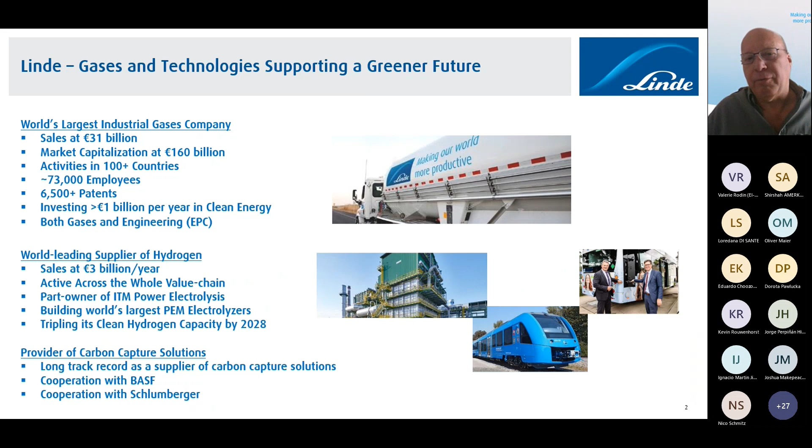Coming back to this: when we talk about decarbonization and hydrogen, it's important to be aware that we should not jump straight to hydrogen. There are a lot of things we should think of first to support decarbonization, not least electrification. If we can use electricity, clean power directly, I think we shouldn't go to make hydrogen first, so to speak, if we can use it of course.

And also don't forget about other types of fuels, low carbon fuels that we can produce and use in this different type of context. So I want to emphasize that. Still, hydrogen is there, hydrogen is highly interesting, and definitely, as I talked about already, Linde is a key player here.

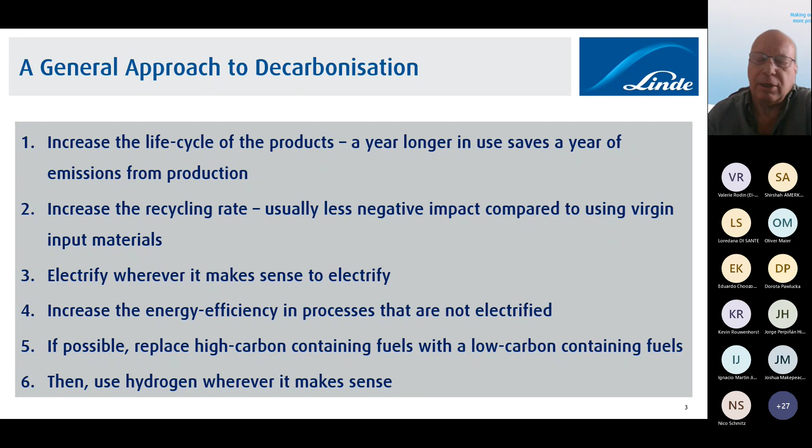We are building huge plants, for example in the PEM sector, 24 megawatts. Kevin mentioned one of them, the one at Yara in Norway, earlier in his presentation. We also have a 35 megawatt electrolyzer in the US in the construction phase already, and so on and so forth.

If we look at the steel industry, a good illustration also for other industries, a fundamental issue is probably not the scale up. Do we need quite large electrolyzers? For a scrap-based steel maker of 1 million tons, if we take that all the way to using only hydrogen, in that case only as a fuel, we would need about 100 megawatt electrolyzer. And if that's a PEM electrolyzer, clearly it's bigger than the ones we have today.

And if we use hydrogen also for the reduction part, making direct reduced iron, for 1 million tons that kind of plant would require about 500 megawatts. So it's quite a substantial scale up, but I don't think that is much of the problem that we have.

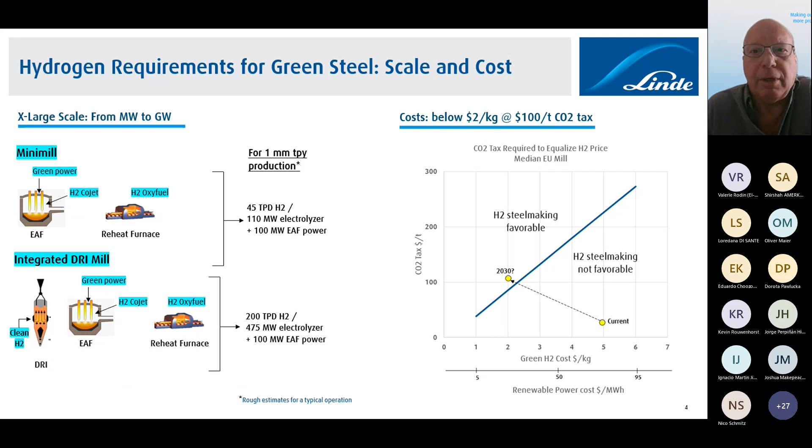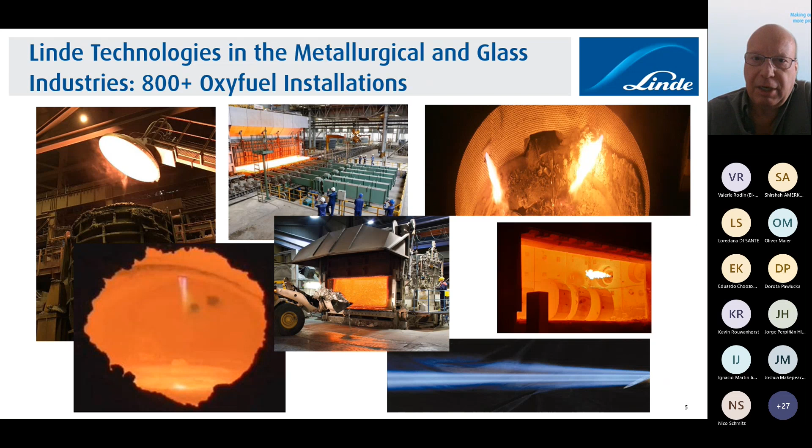If we look at technologies that we as a company, and many others of course, have used in the metallurgical and glass industries, a lot of that relates to combustion. We have done more than 800 installations of oxy-fuel across the metallurgical and glass industries. That's a quite interesting technology because it relates to fuel savings, which is key, of course, when going forward with decarbonization.

Can we use this type of technologies for combustion of hydrogen? We started a couple of years ago doing tests with different types of our burners. Here are pictures from spring 2019, Munich, and you can see 300 kilowatt burners running there, 100% hydrogen as a fuel. It worked out quite well, I would say.

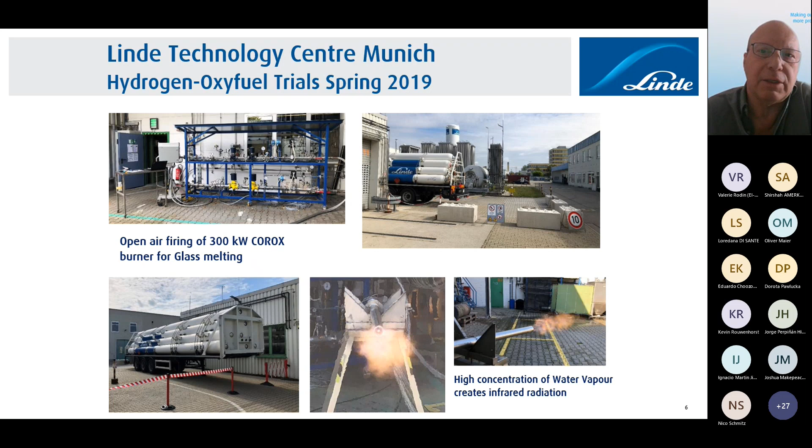This has been particularly tested for glass melting in this case. Also at our tech center in the US, we did a similar type of test going from 100% natural gas to 100% hydrogen. We did that some 3-4 years ago, and we could see that this isn't a problem. The use of hydrogen as a fuel is not a problem.

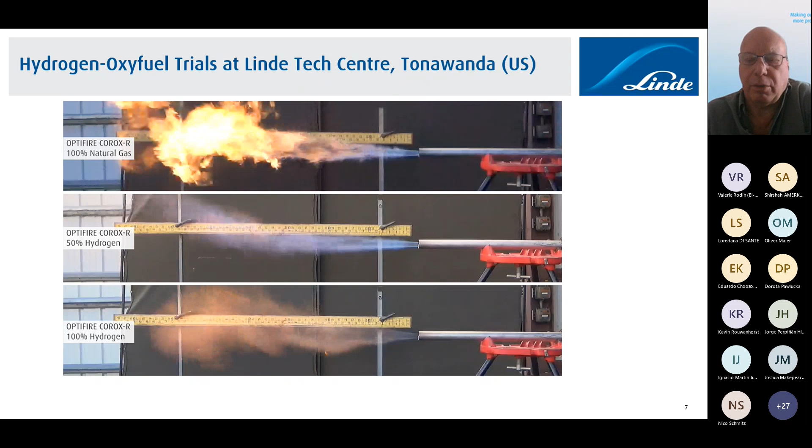Connecting now back to low carbon fuels, if we can gasify different feedstocks of interest, we could create a low carbon fuel. This could be waste plastics, municipal solid waste, biomass as mentioned earlier, and coke oven gas, for example. These are a little bit tricky to feed in a good way to certain processes, and we need to apply quite high temperatures sometimes.

One technology here is the so-called hot oxygen technology, where we are working with 1600 degrees Celsius oxygen. With that we can create, in this case, a syngas that can be used for the production of iron, either in a blast furnace or in a DR shaft. This is something that should not be forgotten, the production of syngas in this context.

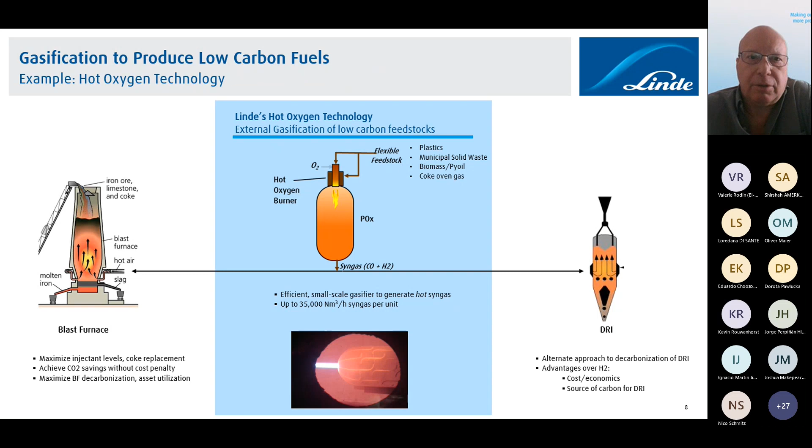This has been tested. For example, we work together with a company called Midrex. This is a world leader when it comes to direct reduction, in their test plant in Charlotte, North Carolina, generating a syngas with this type of technology from, in that case, coke oven gas, but that could be any type of material.

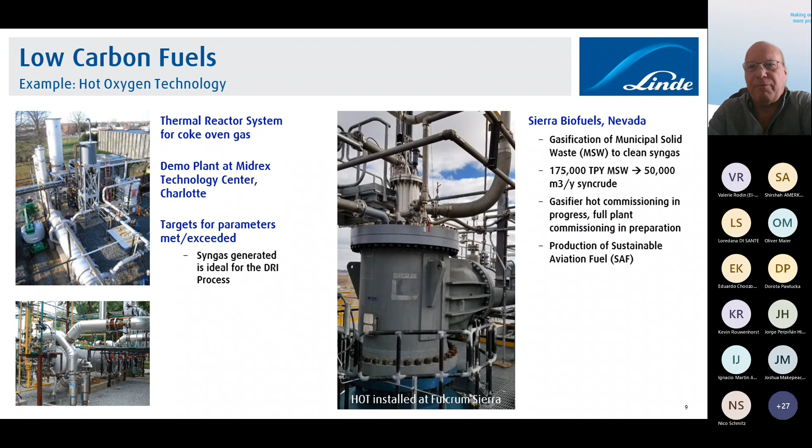A similar thing is currently going on in Nevada, where we gasify municipal solid waste into a syngas that ultimately will be used as a sustainable aviation fuel. Using waste plastics or solid municipal waste is a very nice way of creating also, of course, a circular economy.

Carbon capture is another piece in it, as I already mentioned, and using the iron and steel industry as an example, there are multiple points where we can also capture CO2 from the main sources there. That goes both for the dominating blast furnace-based route and for the DRI-based route using natural gas as a reductant.

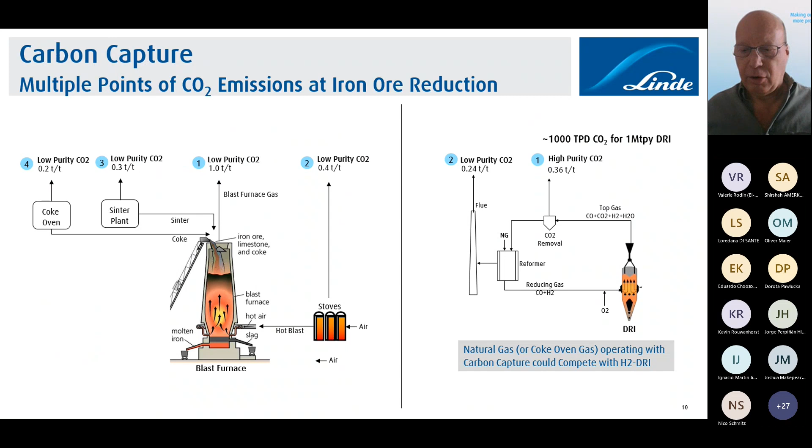And we should keep in mind that transporting CO2 is way easier than transporting hydrogen. So that could definitely be a complementary solution here.

For the sake of combining the last slides I showed, we can of course have gasification and producing direct reduced iron, and also having carbon capture of that. So there are alternatives around here as complementaries to just going directly into hydrogen steel making. And that could be similar in other industries as well.

That could also nicely connect to a circular economy. The beauty of some of this is that it's easier to fit in with the existing production structure than going directly into hydrogen. And of course, we can phase in the use of hydrogen into these processes very nicely.

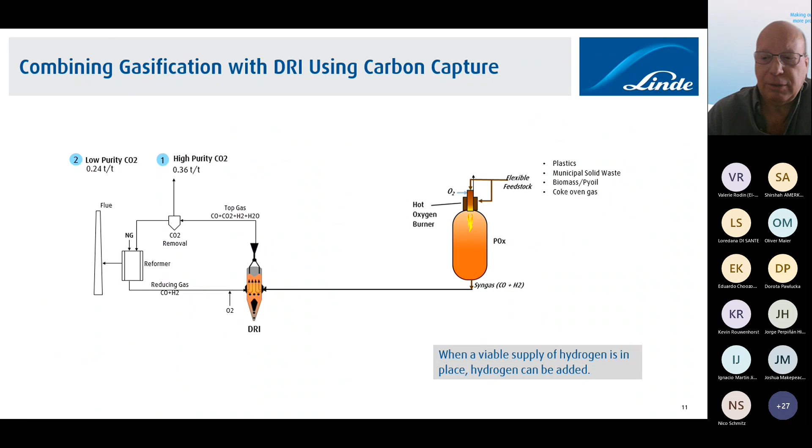However, if we look at the first steps, many times it's not about the reduction, it's about using hydrogen as a fuel. And to do that in an efficient way, we should of course be as energy efficient in our processes as possible to minimize the use of hydrogen.

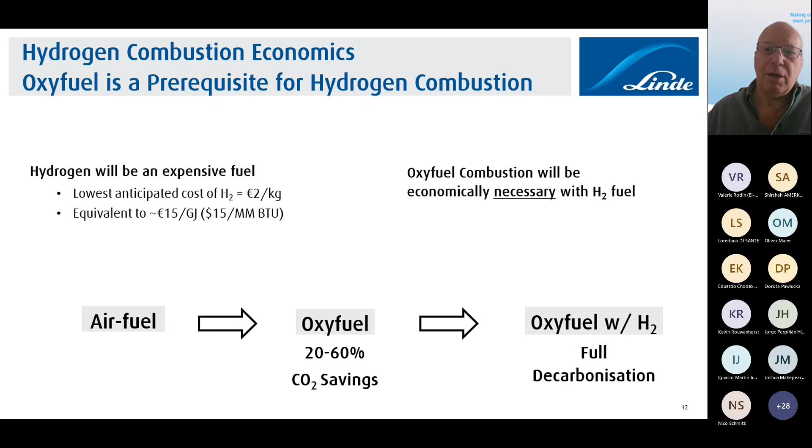Typically, as we've been working with, we go from air fuel combustion to oxy-fuel combustion, which would then reduce the need for fuel by 20, 30, 40%. And of course, we will have the corresponding CO2 savings. So that's a way to minimize the requirement for hydrogen in that situation.

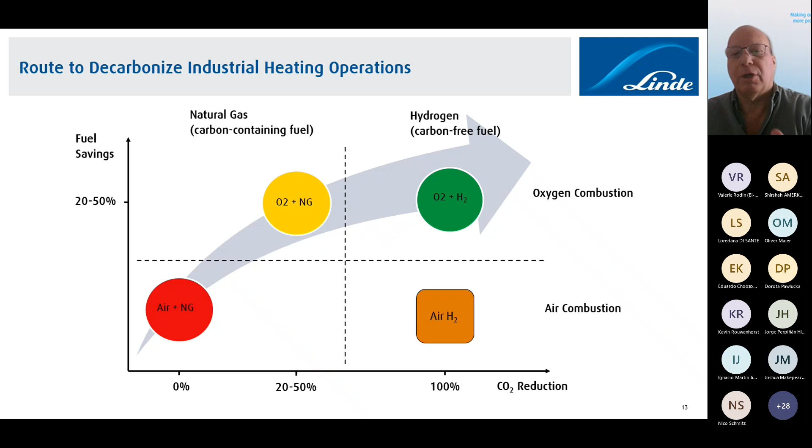So we would say that the path is going from air fuel combustion over to oxy-fuel combustion, and then with natural gas, for example, and then start using hydrogen there. This has been tested in full scale, and one great example is the steel producer Ovako, based in Sweden, where we did the first full-scale test 2.5 years ago.

We have done other full-scale tests together with other customers over time, and that has been done for heating of steel. So we have done tests with, in this case, 25 tons of ball bearing steel grades.

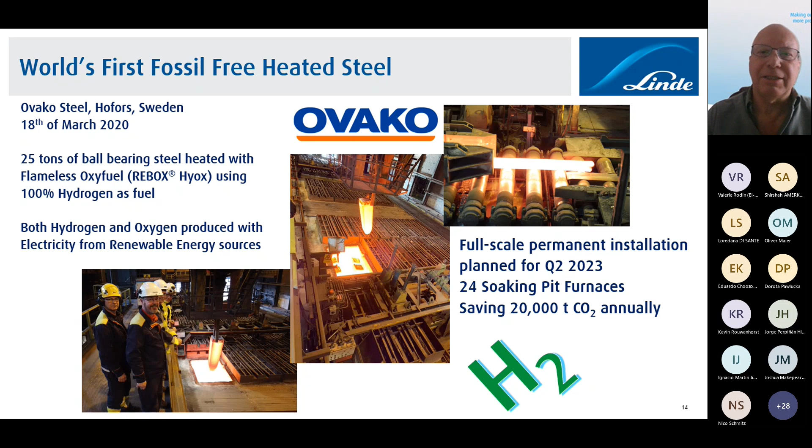We have done tests with stainless steel up to 50 tons, and so on. The good news is that this company, Ovako, is now taking this into a full-scale permanent installation that is supposed to be commissioned in May next year, using 100% hydrogen for heating the steel in 24 of those pit furnaces that you see in the picture. I see this as a very good example, taking this into reality.

Another area is heating ladles in the steel, iron, or non-ferrous industries, using flameless oxy-fuel combined with hydrogen. I think we'll see this coming in full scale next year.

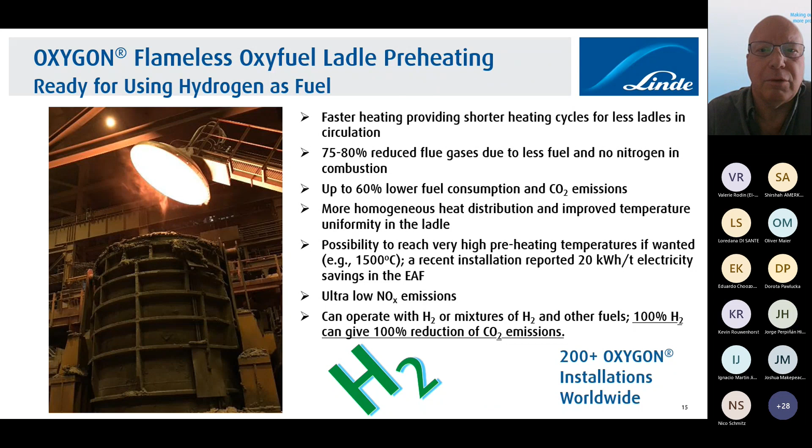So looking across the steelmaking processes, I've sketched the production routes and circled the processes where we see potential use for hydrogen, with comments on where we currently are. In the DRI and famous HYBRIT projects, pilot scale testing is going on. We had full-scale tests with hydrogen use in blast furnaces.

We also see it for reheating, with first full-scale commissioning next year for ladle preheaters. We see it used for cutting and for burners in electric arc furnaces. I know Nico and others will come back to this later. So we are quite well underway with this.

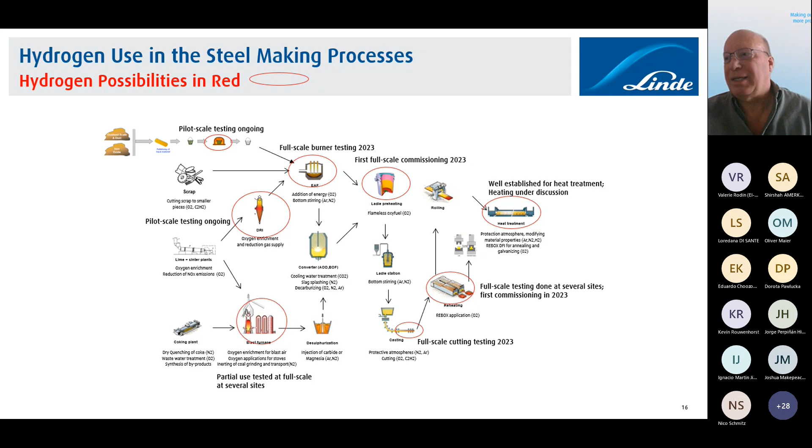What I'm seeing in the steel industry is that the use of hydrogen as a fuel is going ahead quite well, and the big scale use as a reductant is coming in the next step. Summarizing into near term, mid term, long term: we see increased energy efficiency and the start of hydrogen as a fuel happening across the next year, fitting well with the ramp-up of electrolyzer size and availability of renewable, clean power.

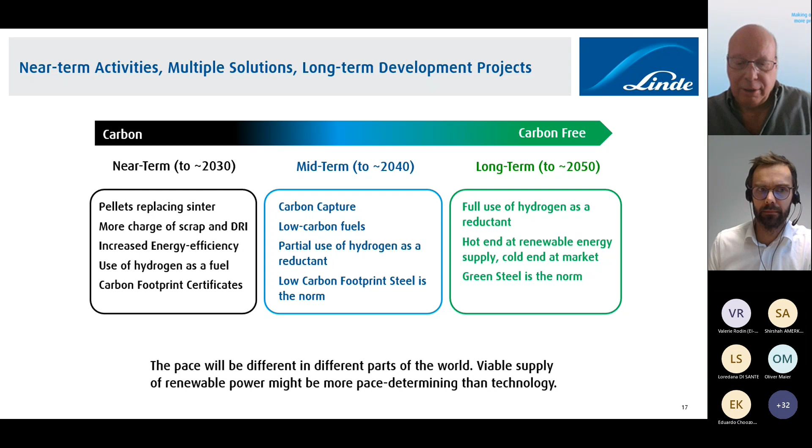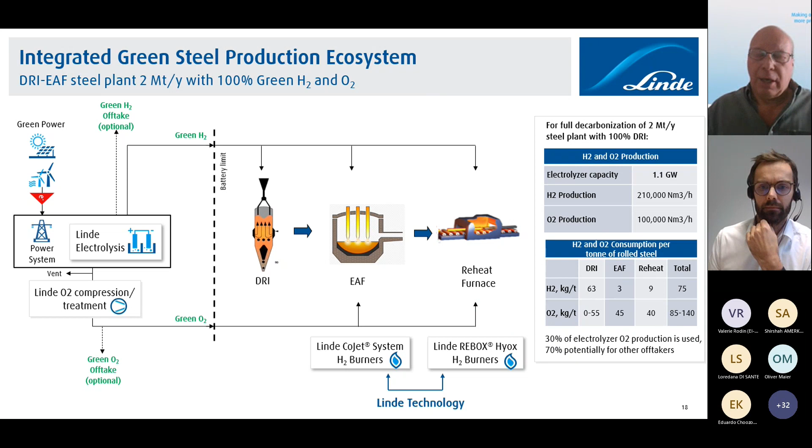The bigger scale will come a bit later, including use as a reductant. Sketching the future for a steel plant, that would require like a gigawatt of electrolysis, probably 10 years from now, where you can use hydrogen for all different processes. It will take a bit of time, of course.

As a last example, tying back to previous presentations, we have the hydrogen value chain related to production of green ammonia. There's a lot to say about this, but I'll leave that out. The thing is, in the same fashion as with ammonia, with steel we can create different hubs where we cater to different needs.

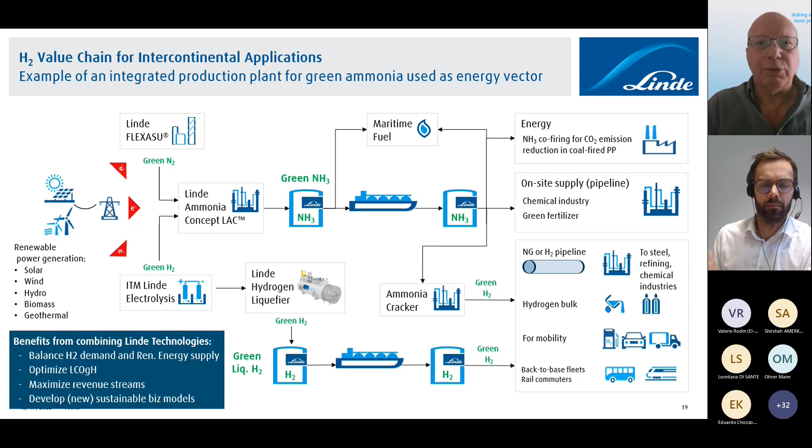We have different off-takers, and we have a big one - it could be ammonia production, it could be the steel plant, but we're also catering to other needs in the mobility sector, etc. So those are some examples I wanted to share with you.

In general, I don't see that we'll have a large problem scaling up the supply of hydrogen on site. Hydrogen is difficult to transport, but scaling up supply on site, I think we'll manage quite well. I don't see much difficulty solving the use of hydrogen for metallurgical and other industries. I think the biggest challenge, particularly in Europe, is the supply of renewable clean power to cater to these needs, which includes expansion of the grid and so on.

So this was my little overview for you. Thank you very much indeed.

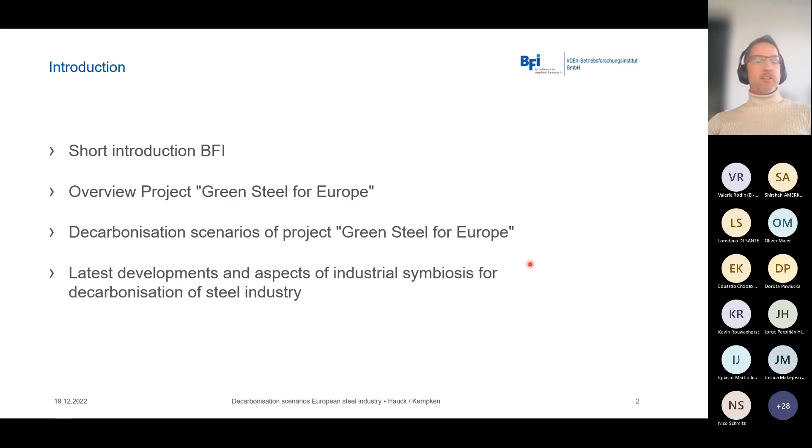BFI is a daughter of VDEh, the Association of the German Steel Industry, but also the European steel industry. We're a non-profit institute doing applied research. Most of our work is directly implemented in industry with a lot of industrial partners, but also research partners across Europe. We have four strategic fields: the first, of course, decarbonization and energy efficiency, most important currently, but also digitalization, industry 4.0, circular economy, and process innovation and process optimization are important topics.

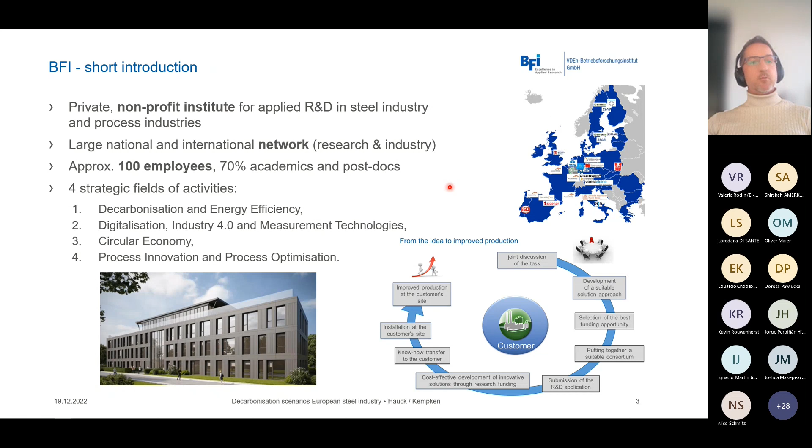So the project Green Steel for Europe was finished in autumn last year. It was a rather large consortium with all main research institutes of the steel industry. It had the main objectives to plan the technological transformation of the steel industry, to identify barriers for decarbonization, to have direct communication with stakeholders, and to rate the investment demands and funding mechanisms in Europe and national programs. Finally, to evaluate and recommend policy options.

So we had basically three work packages. The first was technology road mapping, which mainly resulted in the figures I will show you. Then another work package looked at the financial aspects and the political aspects.

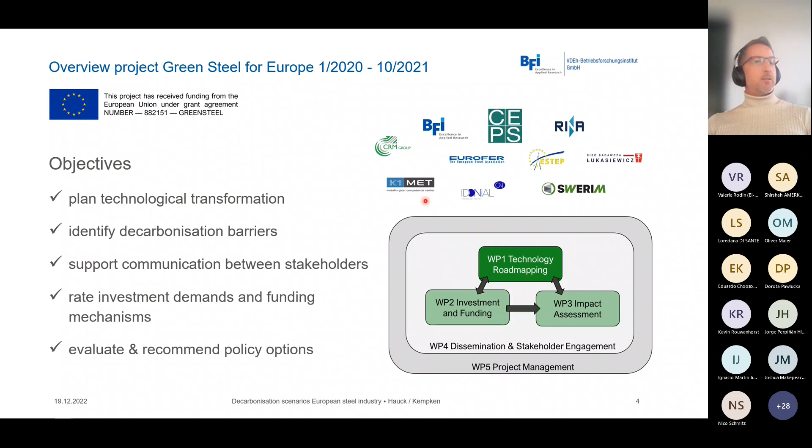We had mainly four topics which we started. First, we collected the technologies which are available and rated them with some road mapping, looking at the development of technical maturity, for instance. Then we looked at the decarbonization barriers - why are these technologies not already installed? We had a close discussion with stakeholders, the steel industry producers, to get a direct feeling and verification of those barriers.

And finally, the main results - these decarbonization pathways, which show reliable estimations of the overall situation of the European steel industry in 2030 and 2050.

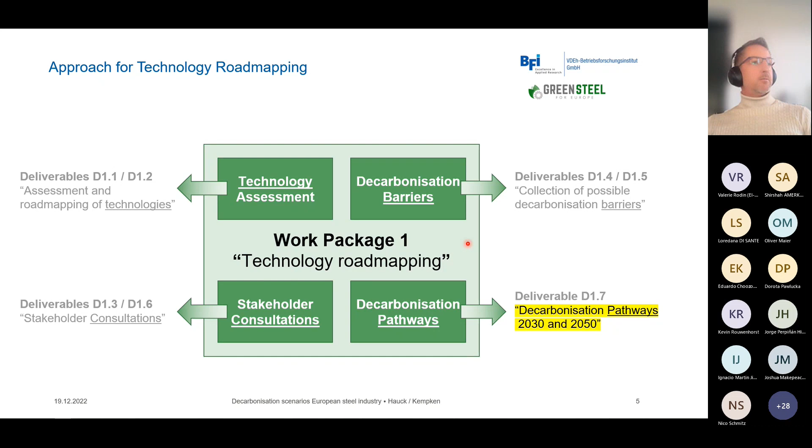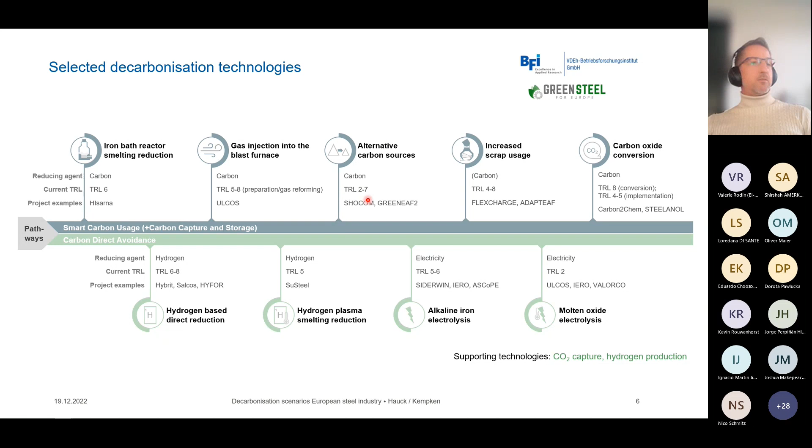Here you can see a quick view of the most important technologies we've selected. The most important ones finally are the lower ones here - direct reduction, which was already discussed, but also plasma smelting and electrolysis at later stages will be important, also scrap usage for instance. So it's just a selection of different technologies with different maturity stages.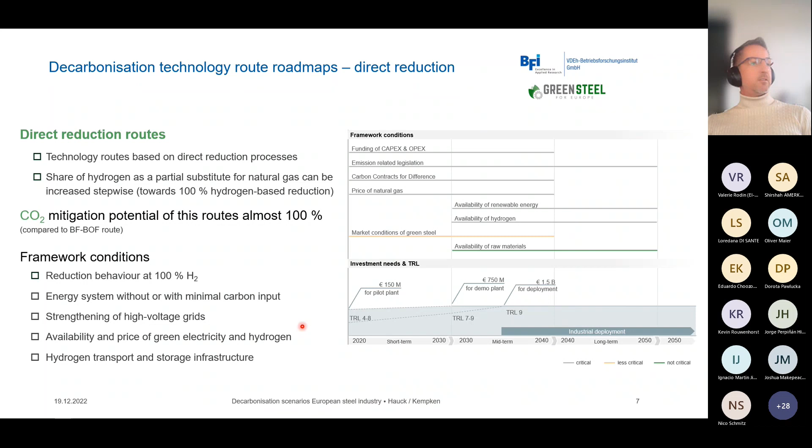Furthermore, we did the road mapping with an estimation of the maturity development, also looking at the costs which are assigned to the different stages of development, and also give some estimation of the industrial deployment in real industrial production. So this was done for all the stages.

And then we had this discussion of possible decarbonization barriers, first developed by desk research and then in detail discussed and assessed by industrial companies. The results were that mainly the financial barriers, as already discussed or mentioned by Andreas, are the issue. Most of these aspects are financial barriers or related to financial aspects.

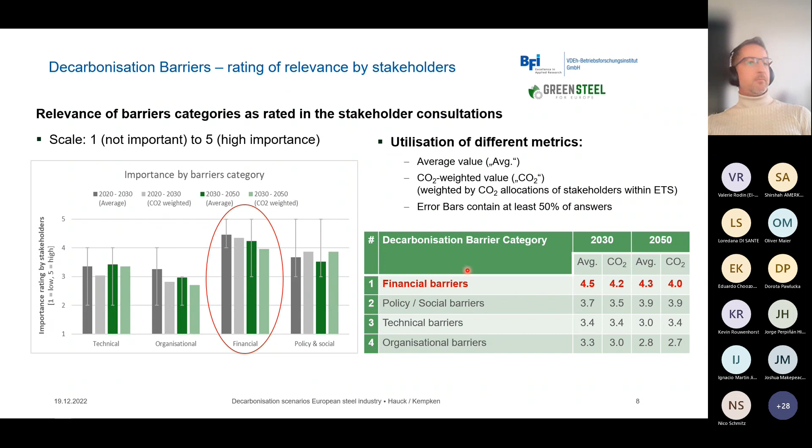And then the last important step was to get a view about the possible future situation with regard to technology development and the industrial production of steel. We developed future scenarios for this and first looked at the barriers, but the main important point also was to look at different national boundary conditions - the different states in Europe have different boundary conditions.

So the northern European countries were already mentioned with a large part of renewable electricity, but also availability of CCS, of natural gases and so on is different in the different countries.

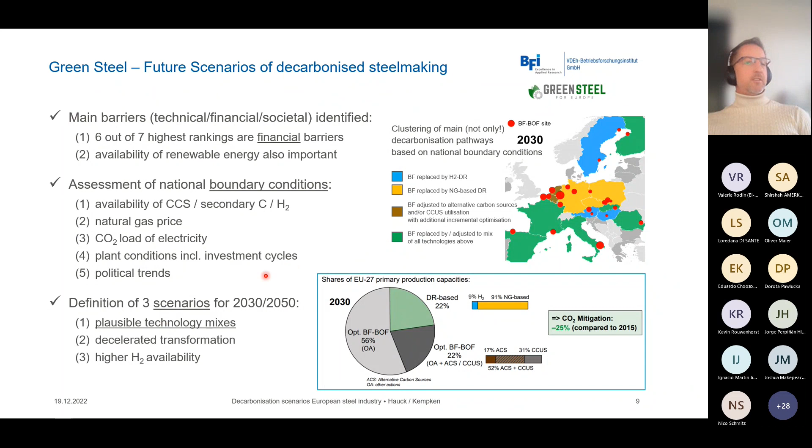So this is the basic scenario, also called mixed implementation, naming I've already seen in Andreas' presentation. So in 2030, we assume that still the main part of the production of steel is done by the blast furnace route, but with different stages of optimization.

So we assume that all of them will have improvements in CO2 mitigation measures, but the main part of mitigation is done by the direct reduction route, which was already mentioned. You can see what was also consistent with what was mentioned, the main part, the large importance of natural gas.

So important for this decision towards the direct reduction route is the flexibility that you can run it either with hydrogen or with natural gas or with mixes of both.

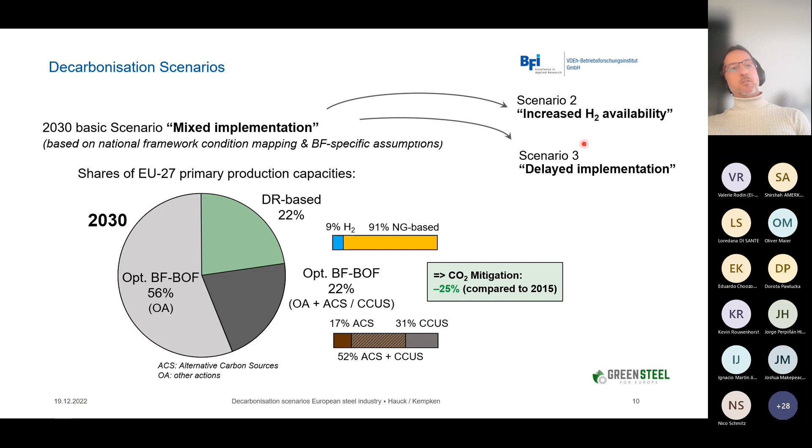So from this basic scenario, we would reach the targets which were at that time the right ones, but now they've increased the mitigation degree, so it's not sufficient anymore. We need to get further to select some of the other scenarios which assume, for instance, increased H2 availability, but also a worst case scenario for delayed implementation. So I cannot present all those scenarios, but I will go to the conclusions.

So the energy crisis, which came up after the final report of the project, definitely changed the situation. The natural gas availability and cost are important aspects in the transformation state. The Russian attack on Ukraine hit the European energy supply to the bones. It was a problem not just with the financial capacity of the steel industry, but also the overall economic viability of all technologies, in particular this intermediate step of direct reduction based on natural gas.

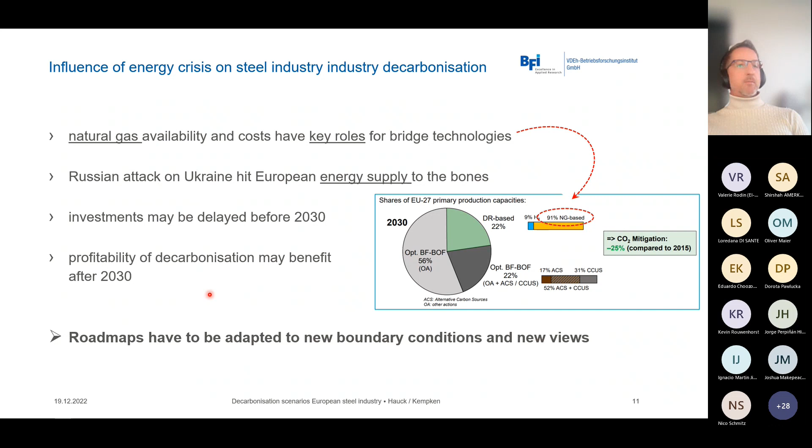So the effect may be that investments are delayed before 2030. That's not completely clear yet, but it seems like this. But finally, the profitability, at least compared to the usual fossil way of production, may benefit after 2030 due to a larger or sooner ramp up of hydrogen and renewable energy supply. So the roadmaps have to be adapted to new boundary conditions and new views. Also, in some places, new technology ideas came up by that time. However, it's all not cast in stone.

So aspects of industrial symbiosis: the main important thing is the supply with renewable energy. CO2 footprint is important. The fluctuation of availability and costs is quite important for operational costs, and these operational costs are definitely defining the existence of the steel industry in Europe. Furthermore, same for hydrogen, looking at possible different alternatives regarding H2 derivatives, but also the question of local production or import of energy is important.

And finally, the alternative of fast decarbonization with a rather low percentage, or full optimization which may take more time, is an important question. And all this depends on the energy systems and also on their integration, because this defines the availability, the fluctuations, and all the costs and their fluctuations. So this is quite important. And also at the same time, the change of technologies from blast furnace to direct reduction and other technologies needs a complete adaptation of material and energy flows, also across industries.

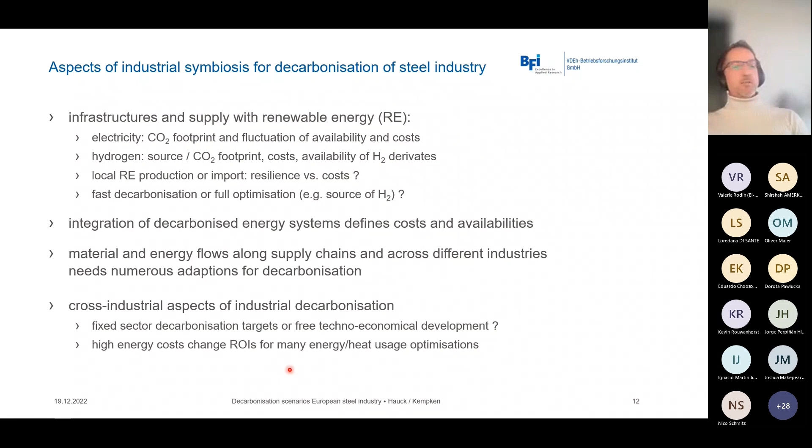So the question is: do we have a fixed political definition of targets, or will we have a free techno-economical development for these transformations? It's to some extent still an open question. Also important is that the high energy cost will change the return on investment for many energy and heat usage optimizations. So a lot of technologies exist, but are not implemented yet.

So the conclusions are: the steel industry transformation will probably result in a heterogeneous situation, at least in the next 15 years, because different plants will have a different speed of transformation. And H2-based direct reduction and electrification will play major roles so far, that is clear. However, the boundary conditions are changing, and so are the decarbonization roadmaps, in particular because the hard global market settings force the steel industry to look at the costs, because otherwise its existence is definitely in danger. And very important, existentially important for this, is the integration of the energy systems, because this defines the supply, the availability, and the costs and their fluctuations.

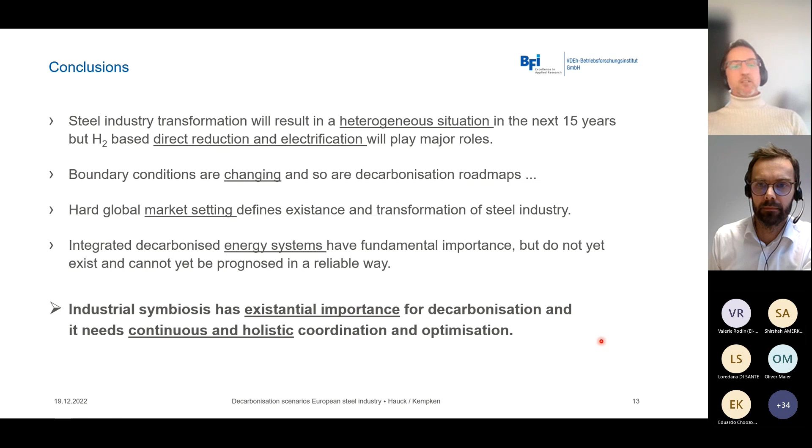So the final conclusion is that industrial symbiosis has an existential importance for the decarbonization of the steel industry, and it needs continuous and holistic coordination and optimization. So thanks for your interest, and I'm interested if you have some questions.

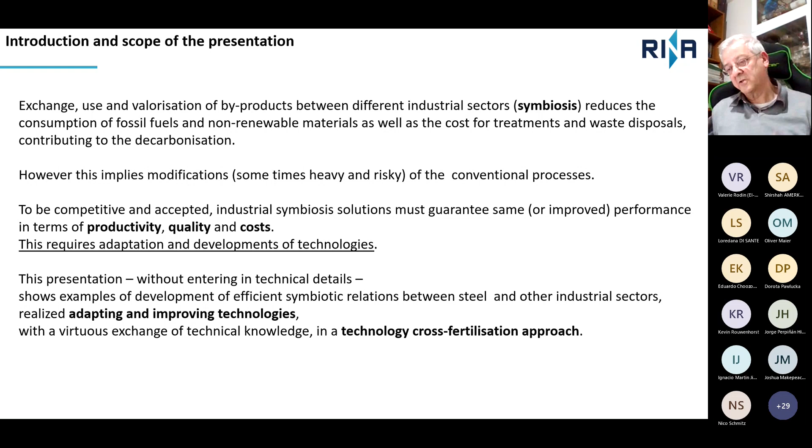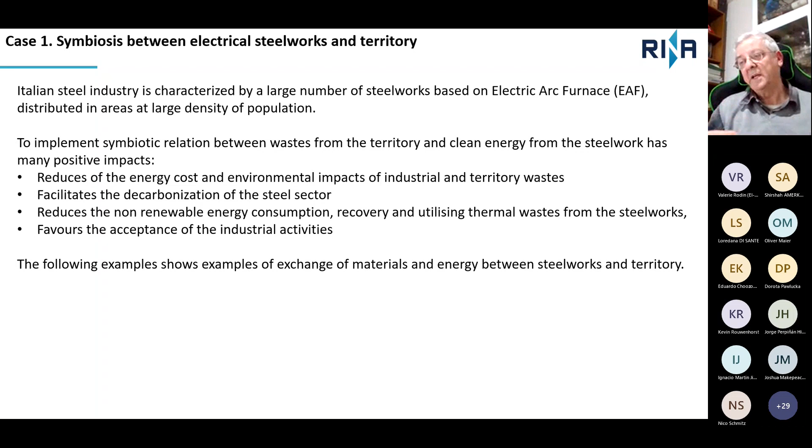I present some examples derived from the experience of typical steel plants in Italy, which mainly use electric arc furnace, a system to melt scraps. The Italian steelworks based on EAF are strongly embedded in the territory, so there is a necessary exchange of materials and energy between the steelworks and territory, which is a trend in development.

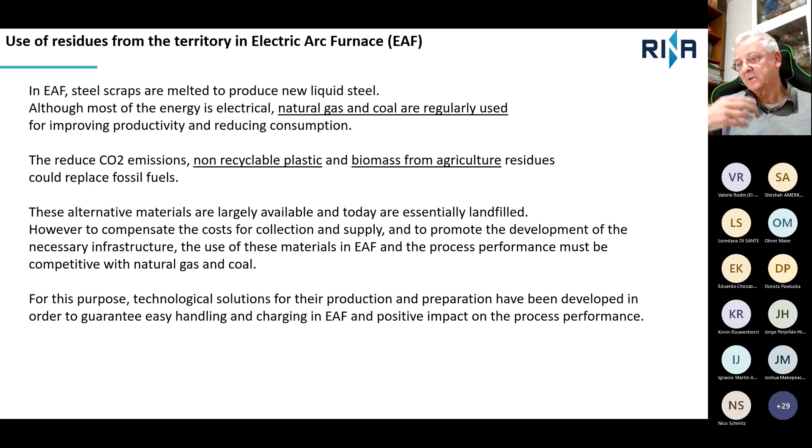The first example refers to the use of alternative fuels in the electric arc furnace. It's mainly an electrical machine, but fossil fuels are also used, for instance natural gas and coal. These fuels could be replaced with non-recyclable plastics or biomass, which can substitute fossil fuels as alternative materials. This requires developing new technology solutions for production, preparation, and treatment of these materials.

The first example relates to the use of plastics that cannot be recycled in the plastic industry. In the project Polynspire, such plastics have been pre-treated to allow easy injection, to be handled and used without problems when injecting into the furnace, while achieving similar process performance as with fossil fuels.

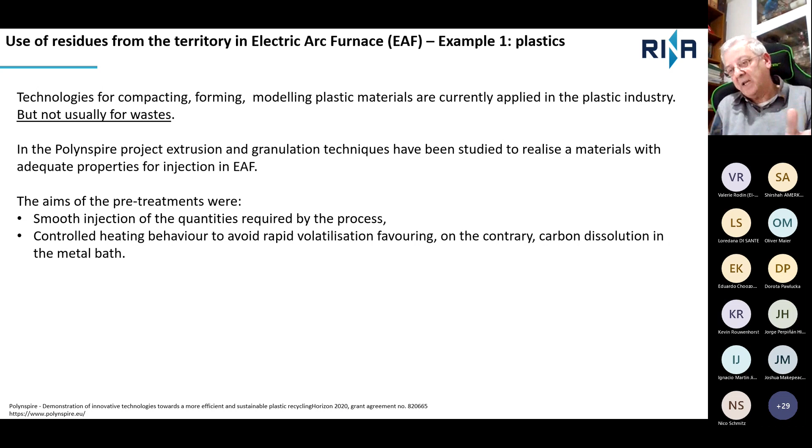In particular, the aim is to control the foaming of the slag, which is the typical practice to improve the performance of the melting process. For this purpose, plastics, which are a mix of different materials with different shapes, characteristics, and densities, have been treated to produce a consistent material with uniform form, density, and grain size.

These techniques derive from typical methods used in the plastic industry for extrusion and granulation of plastics, adapted to develop a specific material for injecting into the electric arc furnace.

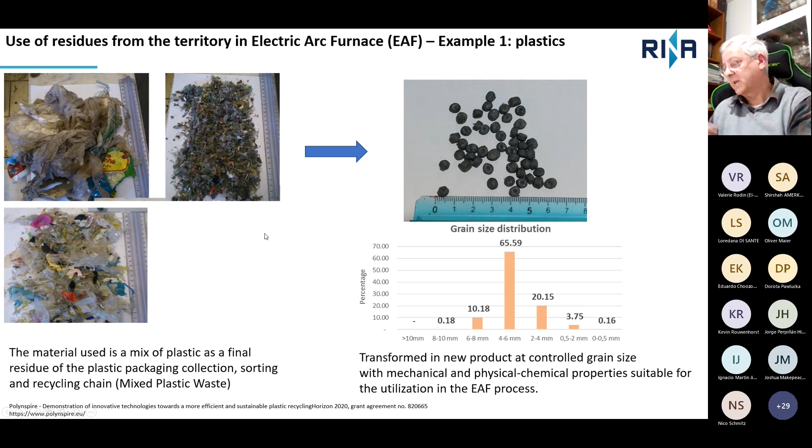On the left is the original plastic waste material. On the right is the new product developed with this new treatment technology. Besides, the project developed special injectors to inject these materials into the furnace in an easy, controlled way.

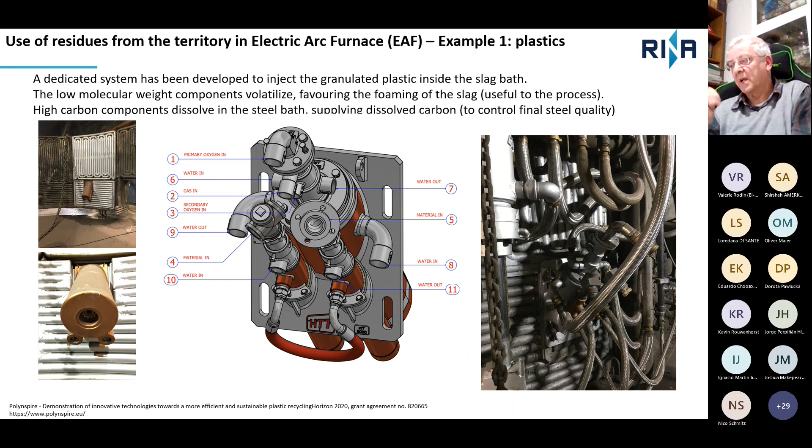The final technical aim was to reproduce the behavior of coal, which is injected in such a way to dissolve in the steel and react with the slag. There was a big effort to reproduce this behavior with very different materials, plastics instead of coal.

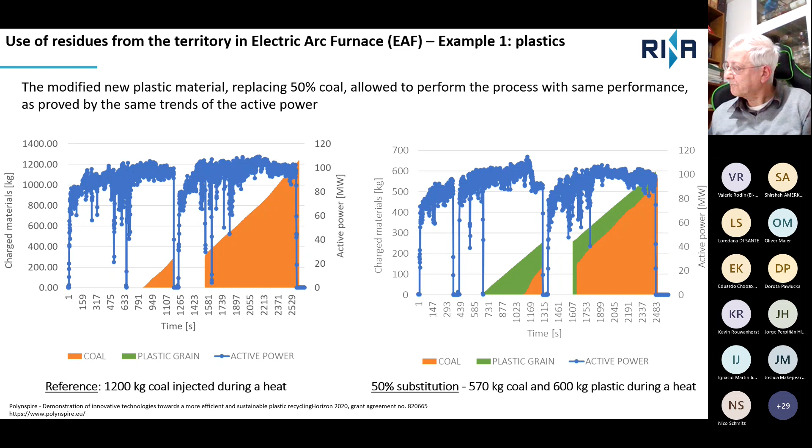The effect was good, and the process was successful, proven by the same process behavior when using fossil coal versus plastics instead. These graphs report the typical amount of charged materials in both cases, the reference case with coal and the case replacing 50% of the coal with plastics, and the behavior in terms of active power.

A second example refers to the use of biomass. In this case, biomass is available, but there are many problems linked to logistics, cost, and collection. From a technological point of view, the main problem faced in the projects GreenEAF and GreenEAF2 was to develop a special biochar from biomass that can be injected with the same characteristics and challenges as in the previous plastics example.

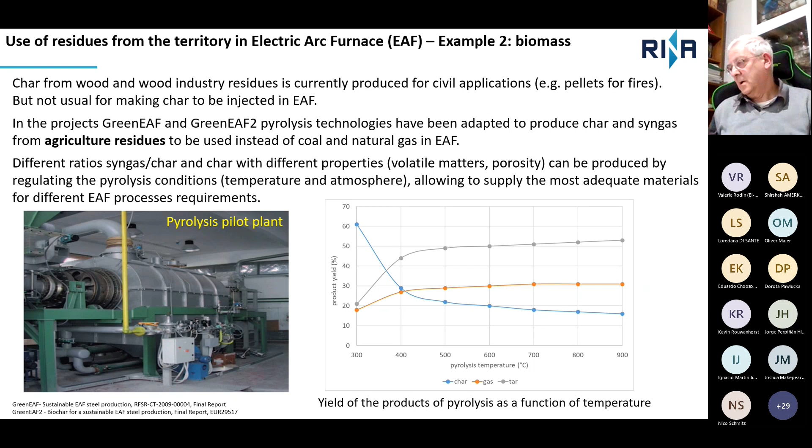Exploiting the fact that pyrolysis of biomass can be carried out under different conditions to produce more char or more gas with different characteristics, different types of biochar have been developed: one specific for injection as powder through special injectors used instead of powder coal, and several types to be charged together with scrap from the basket used to charge the furnace. This special technology can now be considered consolidated, well established, and regularly used.

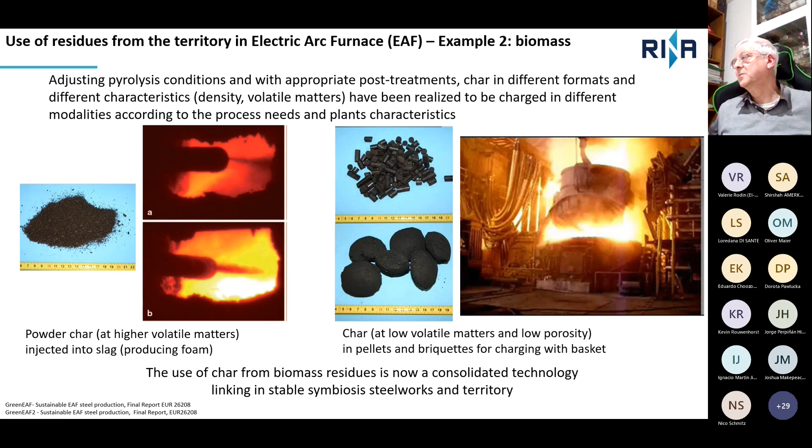The problem is the supply of biomass. On the other side, the EAF can supply energy. The electric arc furnace has a lot of thermal waste that is not used, especially from the top gas, the process gas. This thermal energy can be recovered with special technologies at relatively medium temperature, around 600 to 700 degrees, and used to supply electrical or thermal energy depending on the season — electrical energy in summer, thermal energy in winter — supplied to the territory.

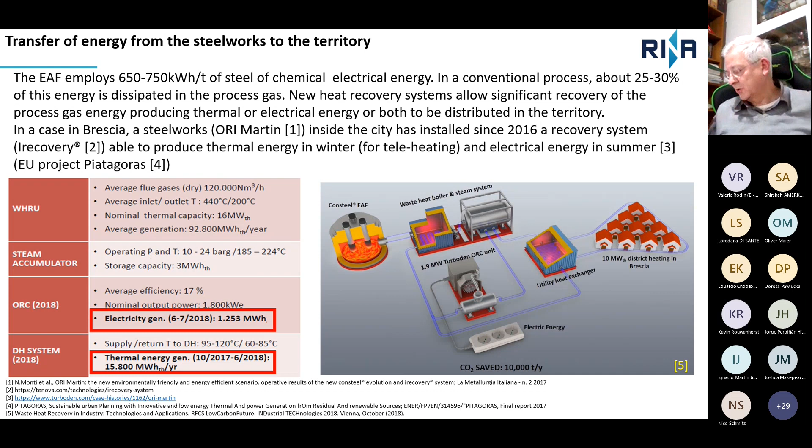So from the territory arrive wastes, plastics, biomass, and residues in general, and the electric arc furnace supplies energy to the area. There is a real symbiosis between different actors in the zone. The last example is the valorization of the slag.

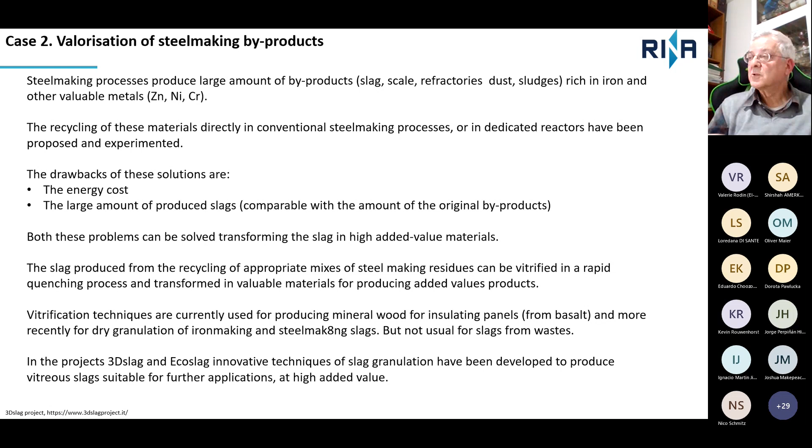The slag is a residue of the electric arc furnace, used for some specific applications, but it is not easy to valorize. In this case, the real objective of this national project is to produce added value materials from it.

As a first example, the dry granulation of the slag, which is a technology well established for blast furnace slag, but not so used or developed for electrical furnace slag. The dry granulation can produce materials that could be used for more applications inside the steelworks or in external environments.

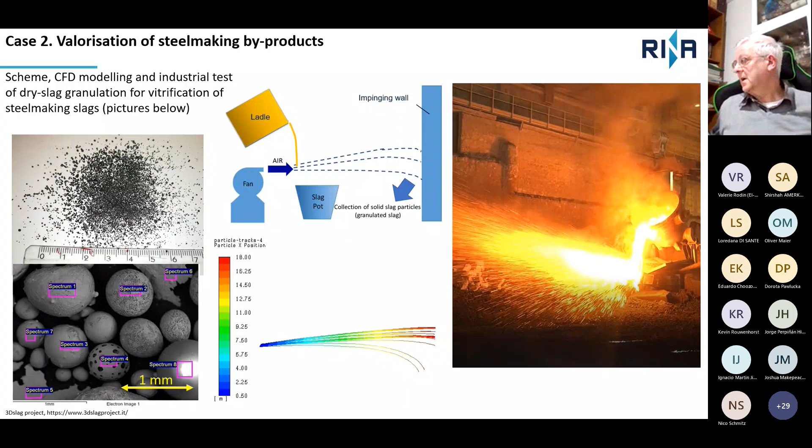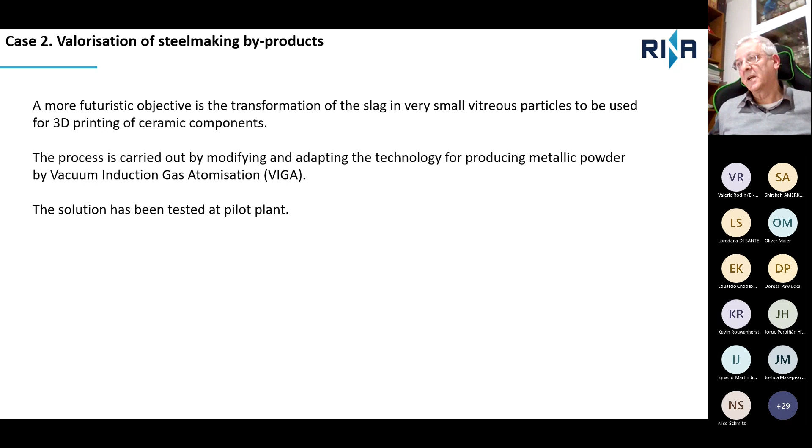Finally, as a last thing, it can be possible to use atomized slag, which means producing very small particles to be used in possible 3D printers for printing ceramic components. In this example, we have performed atomization of slag, producing amorphous slag particles, very fine, around 50-10 micrometers, with a typical vacuum induction gas atomizer for producing metallic powders.

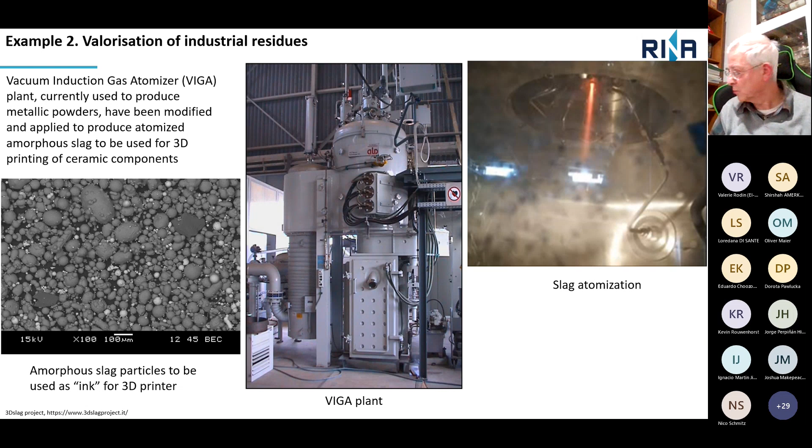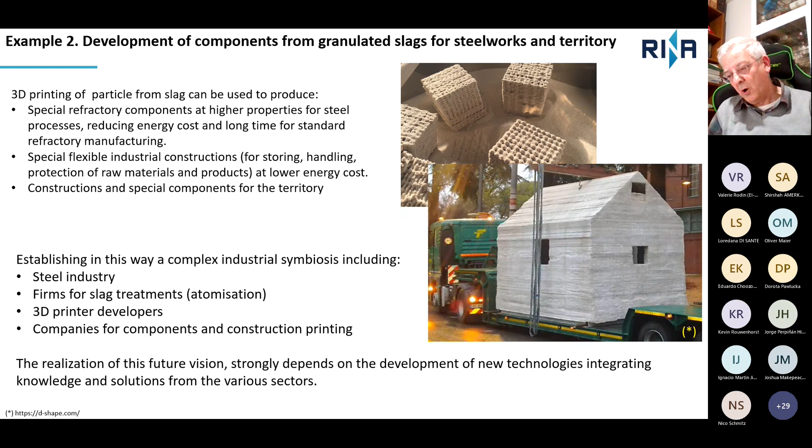In this case, we have adapted the technology to produce slag powders, and these slag powders could be used - there are experiments in progress - to produce special components for the steelwork itself, or also for other contexts. For example, special materials for refractory materials for steel processes, or for civil or industrial construction.

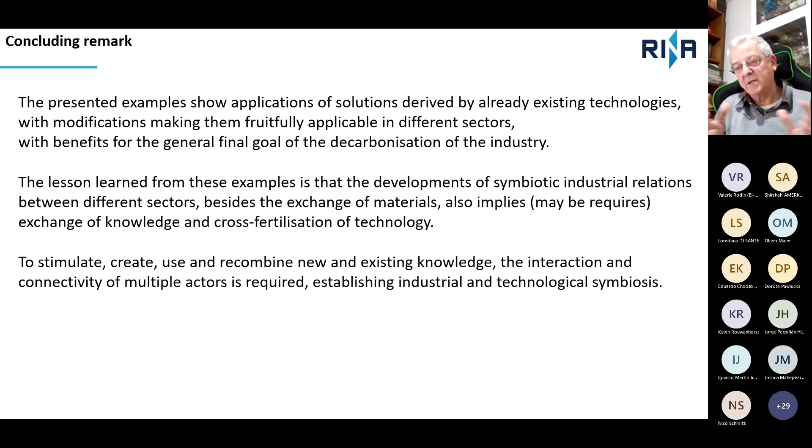This example aims to demonstrate that together with the legislation, rules, and infrastructure needed to develop and install industrial symbiosis at the industrial level, there is a need to develop new technologies. In many cases, these new technologies can be developed using existing technology with appropriate improvement and adaptation, with an exchange of knowledge between different sectors - an exchange of technologies in a species of technological, industrial symbiosis.

Yes, Johannes, thank you for your kind introduction. So now we go into not a deep, but a small dive into the downstream steel processing and how to decarbonize it. We will focus today on hydrogen and ammonia, as the workshop is more about that, and electricity will be only a small part of that.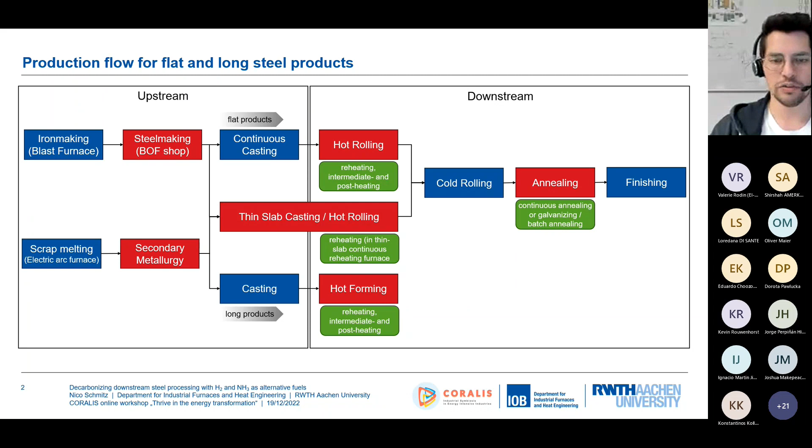There we have a continuous process, called continuous annealing or galvanizing, if we do the additional galvanizing step, or a batch annealing step, performed in batch furnaces. For long products, a subsequent heat treatment is not typical, but it can also be the case. We want to keep it simple today, not to go into a deep dive, so we look at three main processes.

Starting with the reheating furnaces, and this is nearly the same for flat or long products. We have big reheating furnaces, which are there to reheat the steel slabs and bars after continuous casting. On the left side of the picture, you can see such a furnace - quite big furnaces, up to 50 or 60 meters long, with really big productivities of up to 450 tons per hour in continuous operation.

They heat the product from room temperature, or 400 or 600 centigrade, up to 1250 centigrade typically. They are equipped with quite big heating powers, between 30 and 250 megawatts. You can see really big furnaces here, really big powers.

The heat is generated by direct combustion, so we have burners in the side walls and also in the top of the furnace and in the roof. We normally do air combustion here, but oxy-fuel is also an option, for example for better energy efficiency, and also maybe an option for hydrogen oxy-fuel and decarbonization. Typical fuels today are natural gas and steel plant gases, so coke oven gas, and also mixes.

If we now look at decarbonization options, we have the option to electrify this. You see the yellow arrow here on the left side. We have some challenges concerning the power density and the high process temperatures here. So one option would be resistance heating, but with those high power densities, if we want to retrofit those furnaces, that will not work.

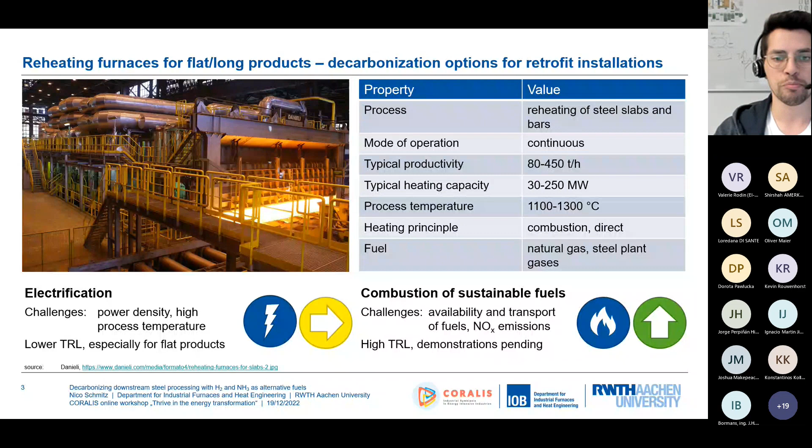If we now go downstream for the heat treatment of flat steel, we have the continuous annealing or galvanizing lines. The process taking place there is a heat treatment, so defined heating and defined cooling of the product in continuous operation. The productivity is a bit smaller there, 50 to 110 tons per hour, with a heating capacity of 15 to 30 megawatts. The process temperatures are also lower, between 750 and 1000 - 1000 is an exception, we are more between 750 and 850 here.

Typical heating principle here is also combustion, but indirect, so we have radiant heating tubes inserted in the furnace to divide the combustion products from the product, and the product is surrounded with a protective gas atmosphere here. The typical fuels we use are also natural gas and steel plant gases.

For the decarbonization side, we have a clear option to decarbonize those furnaces by electrification. Typical topics and challenges here is the electrical supply, because you will have more than one continuous annealing line in an integrated steel mill, so you need 30 or 60 megawatts of additional electricity power there. And there's not so much long-term experience with electrical heated furnaces. To sum up, it's a higher TRL here, and also first lines are in commissioning. So we have the big H2 Green Steel project in Sweden, for example, and they are building a full fossil-free electrical heated galvanizing line.

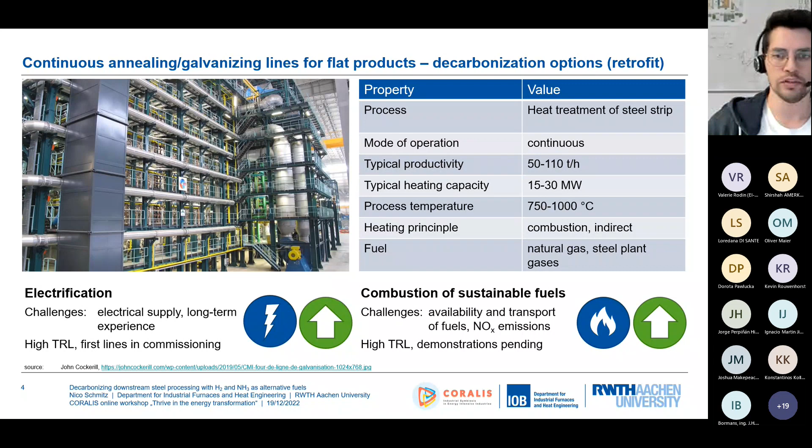If we go for batch reheating, batch annealing furnaces, it's also for flat or long products. We have smaller furnaces, but a lot of these. The process is also heat treatment of steel strip, and it's batch operation, so 1.0 to 2.5 tons per hour. The furnaces, with 0.6 to 1.8 megawatts, are a bit lower in heating capacity. But anyway, you will have 40 or 60 bases of these furnaces next to each other, as you can see on the picture, several furnaces placed next to each other.

They also typically worked with indirect combustion, because we want to protect the coils, or for example the wire rod, from the combustion gases, and insert protective gas atmospheres. For decarbonization options here, electrical supply is the only challenge we have, because we have a high TRL - we have furnaces that are electrical heated in operation already.

For the combustion with sustainable fuels, especially talking for hydrogen, there are some demos that will go into operation next year. So we will see full hydrogen combustion in bell annealing furnaces next year, for example done by Tenova LOI. You can see there's much movement at the moment in the downstream processes.

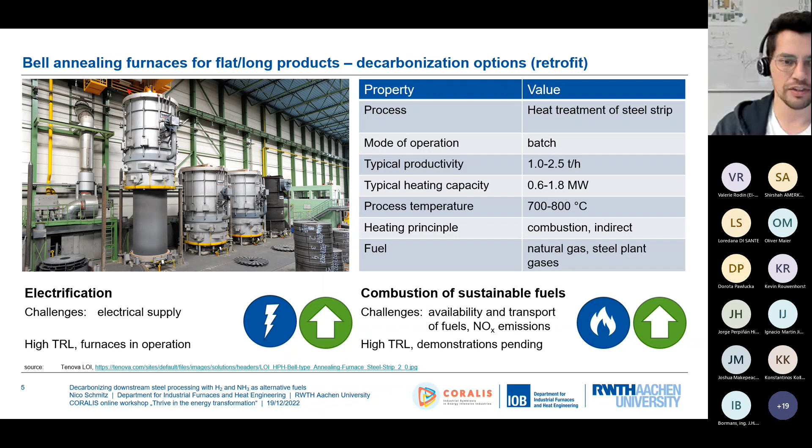If we now look at the fuels we have as options, it's hydrogen and ammonia. And if you look at the fuel properties here, I've marked the most important ones for us, for the combustion technologists. The one is the adiabatic flame temperature.

If we compare methane, so basically natural gas or propane, with hydrogen combustion, we have higher flame temperatures, which could lead to issues with thermal NO formation. Additionally, we have a really high burning velocity, which is a measure for reactivity of a fuel, and it's nearly 10 times higher than methane.

If we now look at ammonia, it's quite the opposite. The adiabatic flame temperatures are lower, which could be an issue for high temperature processes because we need to generate high temperatures for heat transfer to the product. The second point is the low laminar burning velocity, so low reactivity. This could be a possible issue to allow complete combustion because the combustion kinetics are slower.

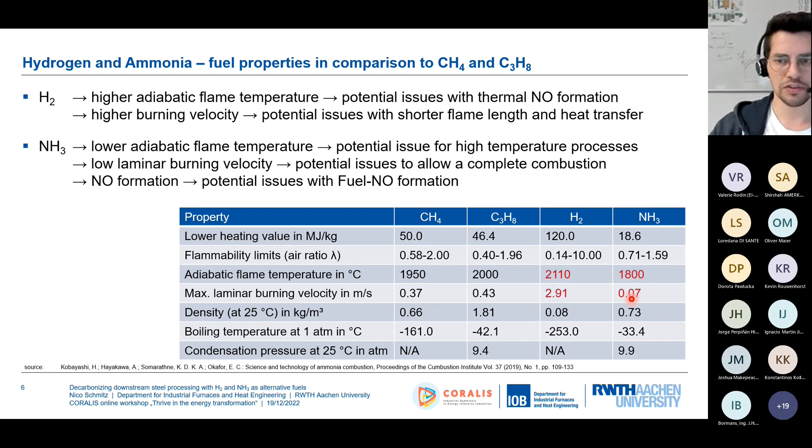I want to say some words about NOx emissions here, because for our plants it's not typical that we have DeNOx systems. Normally we only work with primary measures to lower and minimize our NOx emissions. And for hydrogen systems, the higher thermal NO formation is the first issue.

So you see down there in the blue color, this path of NO formation is mainly attack of radicals, so oxygen radicals or hydrogen radicals that attack the molecular nitrogen and lead to NO formation. This is mainly dependent on the residence time of the gases at high temperatures.

Thermal NO formation can basically be tackled by us with advanced combustion technology, so primary measures. We adjust our burners, we adjust our processes, we implement, for example, flameless combustion to lower the peak flame temperatures, to lower the NO formation.

The second point is about ammonia. Ammonia is one species which is basically fuel-NO forming. So you see it's quite more complicated here. We have several steps that can happen.

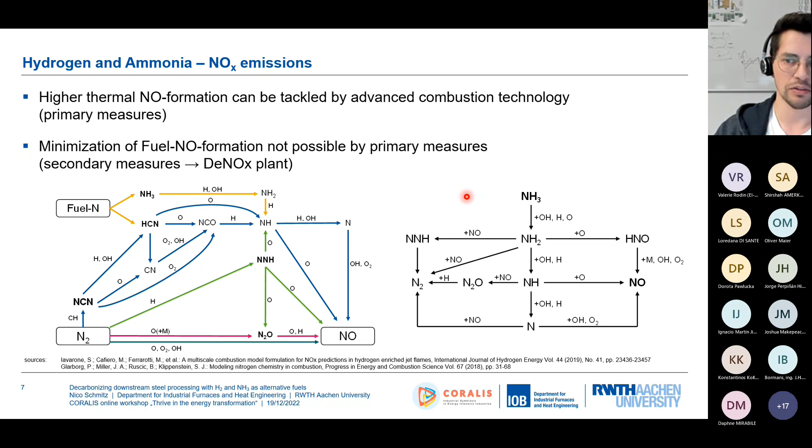This could mean for us that we have to implement secondary measures in our furnaces, so DeNOx plants. This is not typical for us.

An alternative that could be viable for us, instead of direct ammonia combustion, is ammonia cracking, and we heard something about that before. One option is we crack the ammonia to a forming gas, an H2/N2 mixture, and directly combust this mixture without any purification, because we do not need highly purified gases, and this could be one option to save some energy.

Another option would be purification, for example with PSA, and then combustion of the pure H2. We have to keep in mind that we have an additional energy demand here to crack the ammonia.

We need a temperature of about 750 to 1000 centigrade and a catalyst to crack the ammonia. But in our plants we mostly have high temperature waste heat. So maybe it could be an option to create some symbiosis here and put the ammonia cracker in the off-gas system of the high temperature process, to have the ammonia cracked partially or completely to combust it in the furnaces, because we have really good waste heat potential in most of the furnaces.

One potential issue could be that traces of ammonia in the forming gas, for example if you do not do any purification, might lead to higher fuel-NO emissions, like I explained before. But this could maybe also be a combustion technology research topic, or we have to implement secondary measures here, so a DeNOx plant.

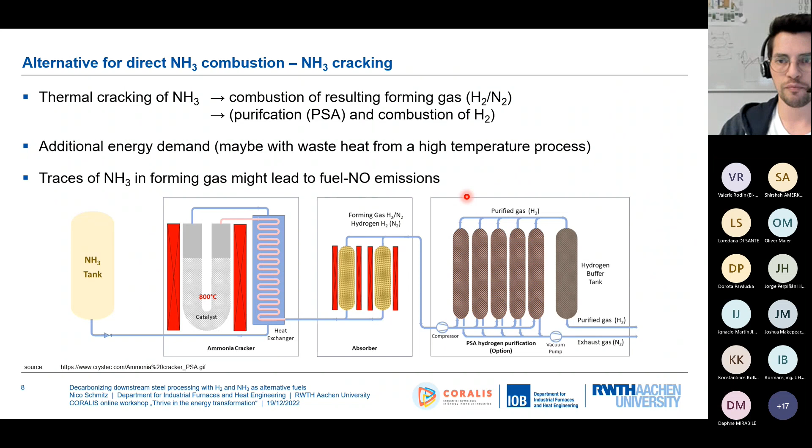So to sum up a bit and formulate some research needs and questions, to give a short outlook: in general, the application of H2 and ammonia in downstream steel processing is generally possible. It's all about availability, price, and the specific location we look at. The hydrogen has to be there where we need it, and this will possibly be different for different plants in Europe. H2 might lead to higher thermal NO formation,

but this can partially be solved by existing combustion technology or adjusting the combustion technology, so this shouldn't be a big issue for the future. The demonstration of H2 combustion in furnaces is already happening, as Joachim showed before, and it's also happening now in several European funded projects and also in other, more nationally based projects.

We already have some research needs that we have to address. We have to look closely at the processes and products and demonstrate the use of hydrogen in those furnaces on a large scale to be sure that the processes work fine. What is missing at the moment is long-term experience, and we have to see if the burners will work for a long time, if the refractories work for a long time, and so on.

Other issues are then standardization, especially for the gas supply systems, for the instrumentation and so on, where there is some standardization missing at the moment. And the last point for hydrogen combustion that is important is NOx emission legislation, because at the moment it is not fair NOx emission values that are defined if we compare natural gas combustion to hydrogen combustion.

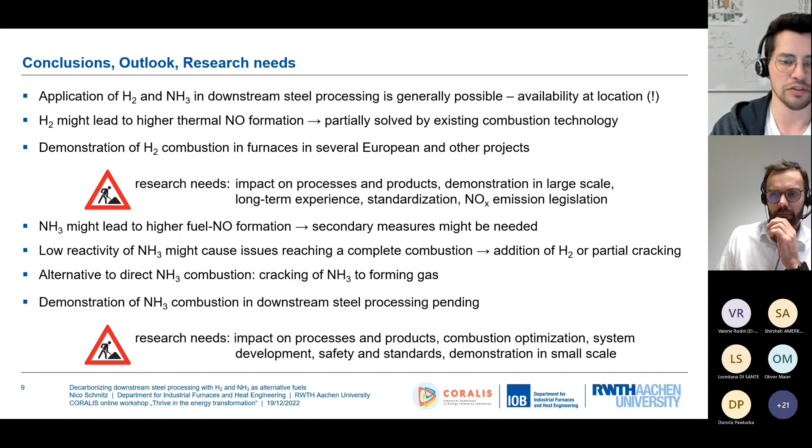To sum up a bit, for ammonia combustion we are much lower in TRL than for hydrogen. So for hydrogen, the demonstration in large scale is pending. They're working on that at the moment, but for ammonia we have not seen it by now. Yes, that was my take on hydrogen and ammonia for downstream steel applications.